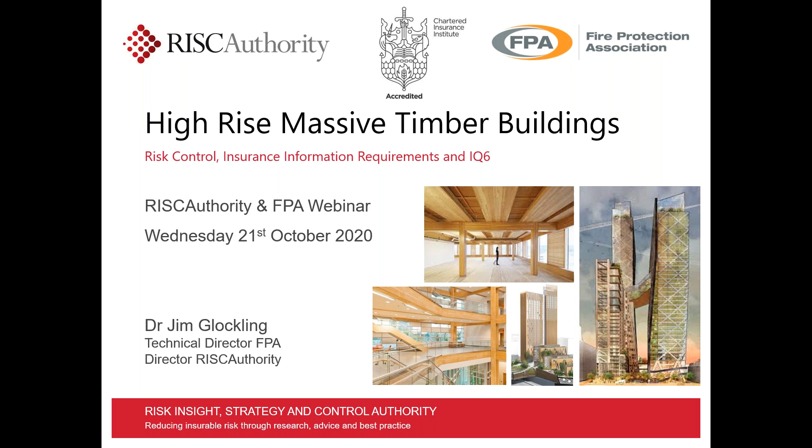Obviously, government only mandates requirements which stop at life safety only. So the work we're discussing here today is the product of the RISCAuthority Passive Working Group. And as Courtney just said, if you have any questions, we'll try and field them properly and get you proper responses, but not during the webinar. It's actually kind of too difficult to keep your eye on all these things at once.

As a requirement of the CII accreditation, I need to show you my credentials here. I've been fortunate enough to work in forensic fire investigation and run laboratories at the Loss Prevention Council, the Building Research Establishment, and now the Fire Protection Association. So that's a little bit on my background and credentials.

It's also a requirement to look at the learning outcomes for this and to revisit them at the end of the talk. So I've thrown in a few seemingly strange elements into this. Drivers for change are worth touching upon, but these next two, the challenge of standards and the simple model for resilience, I believe these are important to cover briefly, because I think that sets the scene as to some of the questions which we ask, and certainly what insurers covered when it comes to understanding how buildings might perform against a range of insurance perils.

Then we look at, just very briefly, at the types of massive timber construction, the safety and insurance perils, and then we give you a walkthrough of the IQ6 questionnaire. We've set aside an hour and a half for this, but hopefully we can cover it off in around an hour and won't go too far over that.

So the background to all of this is obviously related very much to sustainability, and it would be very problematic for anyone not to support sustainability and saving the planet as an ambition. But what we currently find is that sustainability gets pursued in a very single-minded fashion, and this can lead to the introduction of some materials and methods which we find rather confusing and consider to be quite detrimental to the construction of buildings. This shows this single-minded pursuit - it's not an excuse to leave your brain at the door. There does need to be further engagement with stakeholders so that all perspectives are properly understood, because some of them may have quite a strong case for why things need to be done slightly differently.

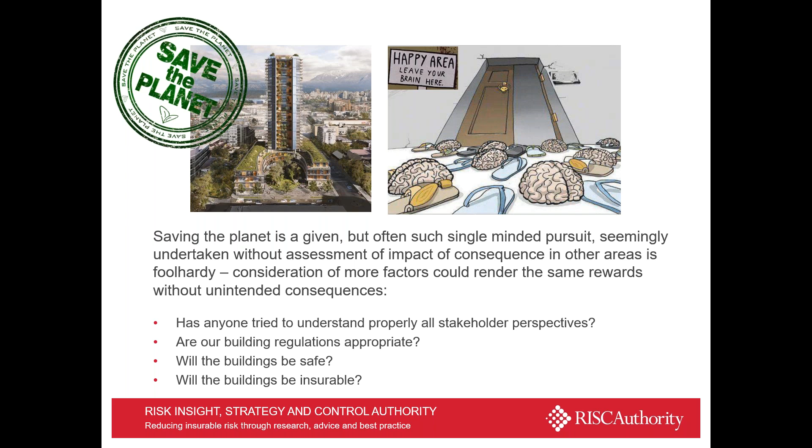I'm sure if done correctly, the advantage of what's trying to be achieved can still be achieved, but without some of the downsides. Really linked into all of this will be consideration of how well our building regulations can support the introduction of these new materials and methods, and whether buildings will still be safe, and will they still be insurable?

So those are the obvious drivers, and you don't have to look too far in the news to see that everybody is signing up to a zero carbon commitment going forward, and very admirable that is too. I think the trouble with this is, whilst it's an ambition that must happen, we do need caveats to accompany some of these brave messages.

Are we going to try and achieve this without reducing safety or property resilience, business resilience, or without reducing service delivery resilience for schools, hospitals, care homes and the like, without reducing fire and rescue service support, and maintaining insurability? These do need addressing, because otherwise we could end up in a very different sort of environment.

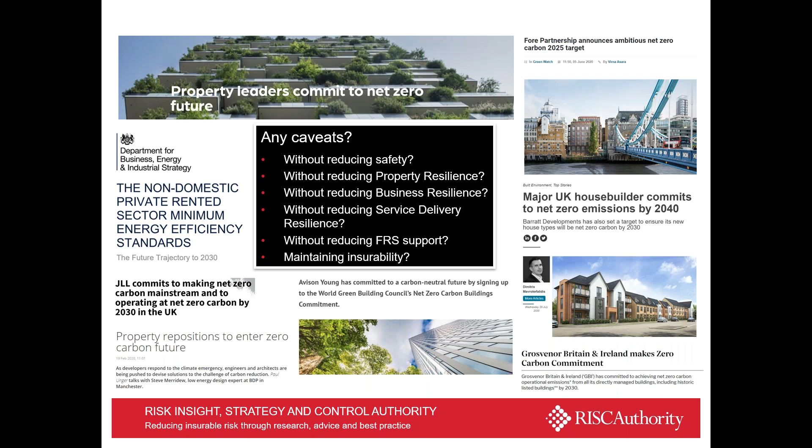And we are starting to see in the news some of these issues starting to arise, and I'll touch on those later on. I mentioned, obviously, we're going to rely very heavily on standards in this brave new world, and I just wanted to look at some of these.

The recent issues with cladding post-Grenfell has highlighted the challenge of standards and how difficult they are to get right, to properly describe how buildings will actually perform at the end of the day.

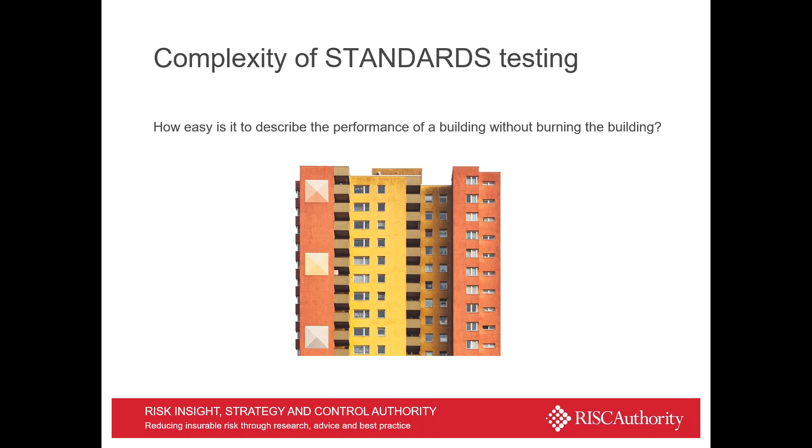Now, I don't want to underestimate it. It's very easy to criticize standards, but I can tell you from first-hand experience, it is also very difficult to create standards which are infallible, and to try in isolation to seek to achieve the overall objective, because it can be very difficult.

But one of the issues that we have is the scale of tests, and what I've tried to put here is a new word, 'monkeyability' - the ability to try and change the outcome outside of the intent.

We go from very small scale testing - you may have heard of things like the bomb calorimeter, which gives you an absolute result on whether the materials put in it can burn. They burn them in a high oxygen environment, and if they can burn, they will burn. The nice thing about this is it's very simple to describe all the materials that go into your building in their key performance of ability to burn, and it's an absolutely dependable result, and it's very cheap to do this type of testing.

When we go up in scale, we get sort of component and composite testing. The item you see second from the left is a cone calorimeter. Now, this type of test has been...

really rather poorly used historically to describe the fire performance for some very large building systems like sandwich panels, where they might take a sandwich panel which in its actual life might span 10 meters, and subject it to a test of just a 10 centimeter sample, and obviously under a very limited heat source that this provides, it doesn't do a great deal. And actually, if you rely on those sorts of results to infer the capability of that material at real scale, you can go horribly wrong.

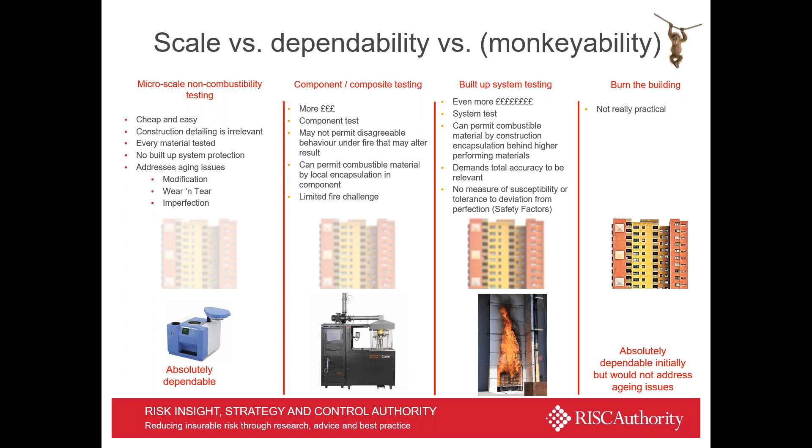How does it differ from the far left-hand side? Well, whilst it's a bigger test, you're testing a system of parts, and so in this type of testing, combustible materials can be tolerated because they can be part of a built-up system where they are essentially encapsulated behind higher performing materials. And of course, on the far right-hand side, we can burn down the whole building, but that's not often practical. So where we go with this, it's quite difficult to establish.

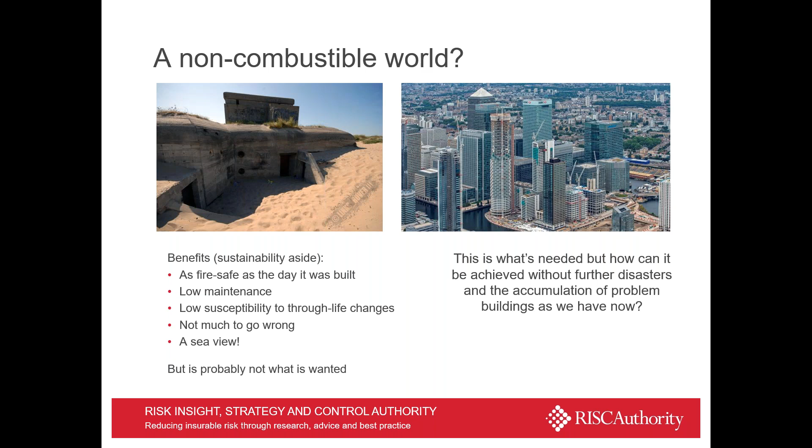And we need, going forward with anything, we need to keep one eye on that, so we're not just creating more problems for the future. And that's very much, hopefully, what this talk will assist with in what we do.

So, in effect, while standards we have got used to relying on them very heavily, it can go wrong. And certainly when it came to cladding, really the test became the focus of effort rather than the real life situation. As I mentioned, it left out some critical factors, and people relied too heavily on it and stopped looking at the building to see if there were any dissimilarities between the test and the building. So that can be challenging.

To standardize really limits the variation of what actually gets experimentally looked at. So you really do have a very tunnel vision of how things respond, whereas actually, when you want to find out how many materials respond, it's good to have variety of what you actually looked for. So it can lead to a very blinkered form.

Maybe an example of that might be for some of the timber testing that we see. We see flames, a ventilation path through a window, but how might that change if the door was allowed to be open as well? Would that change the outcome of the test? So we need variety to understand the full picture for the full scope of how systems get used at the end of the day.

Big criticism, obviously, is that any standard can simply be repeated until a pass is achieved, and all failures forgotten is a poor test. Fires can be chaotic, and we get surprised occasionally in the laboratory ourselves as to how, with seemingly identical tests, one time it performs well, and maybe the other 9 times out of 10 it doesn't. So there needs to be some tightening there.

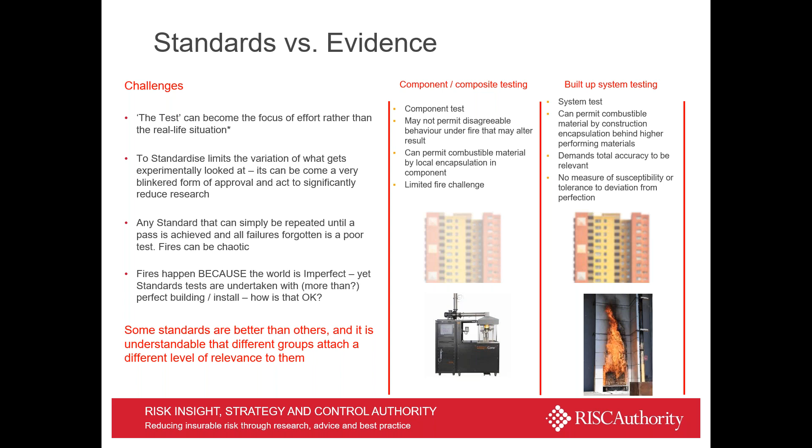If I'm trying to sell a product, I undertake very expensive testing and go to great effort to get a test done and hold it in high esteem, and it must be rather worrying when others may treat it slightly differently. But hopefully we can demonstrate that it's with some reason.

Just by way of example, which I'm going to revisit at the end here, sandwich panels filled with polystyrene. I mentioned earlier how they had a big impact in the food industry. Here is a simple test that we did in the laboratory many years ago.

The incident fire that we applied to this built-up product is described by the red line, and this is the heat release from a gas fire that we put up against it. Now you can see that even at 50 kilowatts, 100 kilowatts, but even at 300 kilowatts, you could almost be mistaken for thinking that this product is non-combustible in its nature, or as a built-up system, it's non-combustible.

However, just turn the heat up a little bit more to 500 kilowatts, and it really plays, and boy, does it play. So great care is needed to put a test forward that will accurately describe the circumstances of end use. At the end of the day, you can only see as far as you look, and tests need to be challenging enough to the realistic environment that they show you the correct response of the materials.

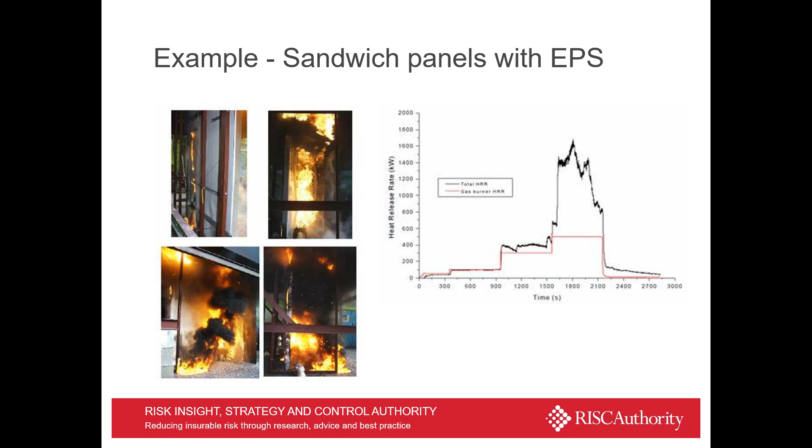Right, that's enough on standards. Just a quick thing on resilience also, and I hope this doesn't appear too off-piste, but I feel it's important. There are mechanisms now within our fire engineering guidelines to introduce new features to the design of a building, not just the architecture-driven ones of form and function and the legislative-driven ones of life safety, but now through documents like 7974, you can introduce business and insurance-driven objectives.

And it starts with a company's business impact analysis. How do we hope to be served by this building? And then that sets the fire safety objectives.

So rather than just think of evacuation before collapse, which, if we're being blunt, is where legislation takes you, you can start to specify other things, such as, well, I'd like the fire to be put out. There's a good starting point. I'd like to recover the compartment within a week, and I'd like to recover the business that I've operated within that compartment within the month and be up to normal capacity by then.

These are all perfectly good fire safety objectives to set, and fire engineering is a perfectly good toolkit of parts to achieve it, but it needs someone enlightened enough in the first place to think further than just what the government needs to see, because it is a very, very low bar.

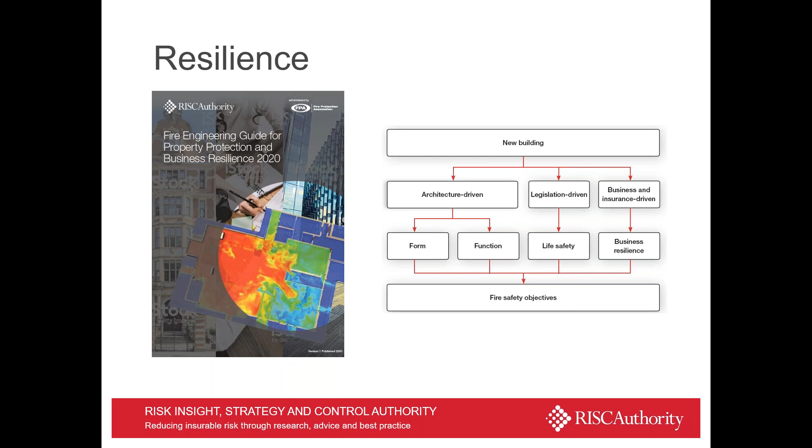Now, if we want to give a nice structure to resilience, because I hear a lot of people talk about it, and it's not always very clear to me, but the best source of information is really from Military Asset Protection, who we do a lot of work with, which breaks resilience down very simply into susceptibility, vulnerability, and recoverability. And it works for any peril, not just this.

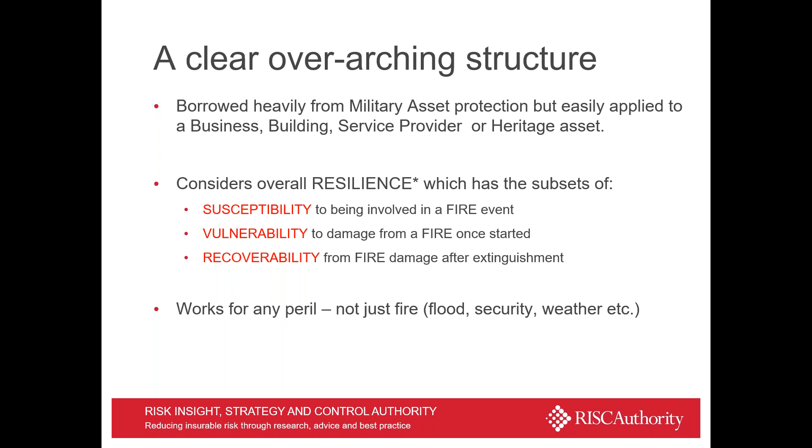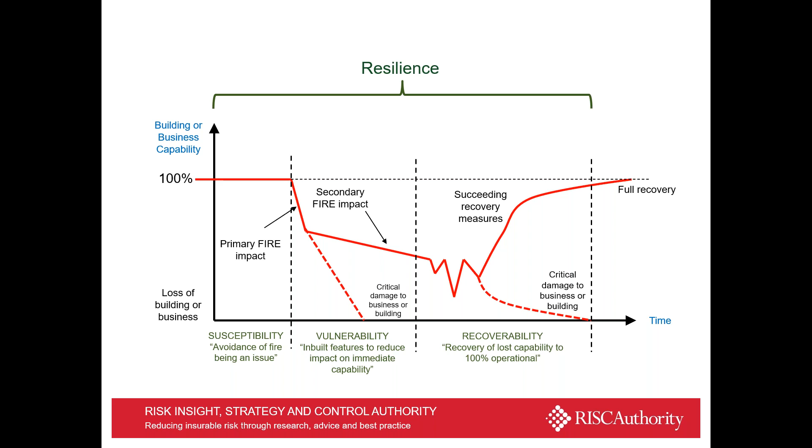And if we look specifically, it also provides a pecking order of the measures that you might put in place to protect your business or your building. Obviously, susceptibility, it's better to avoid than have a problem. But if you are going to have a problem, you need to curtail the amount of damage done. It's a secondary issue. And then thirdly, how you recover is the final stage.

So susceptibility, how can we reduce the likelihood of anything happening? Well, this includes use of non-combustible materials. If things can't ignite, and generally don't catch fire or sustain burning, then you are inherently less susceptible. Preventative management, predictive detection systems, design simplicity, security, and it may look funny being in there, but not relying on people. Having systems, because we know people can cause a lot of problems when it comes to fire, and it's no exception in this case.

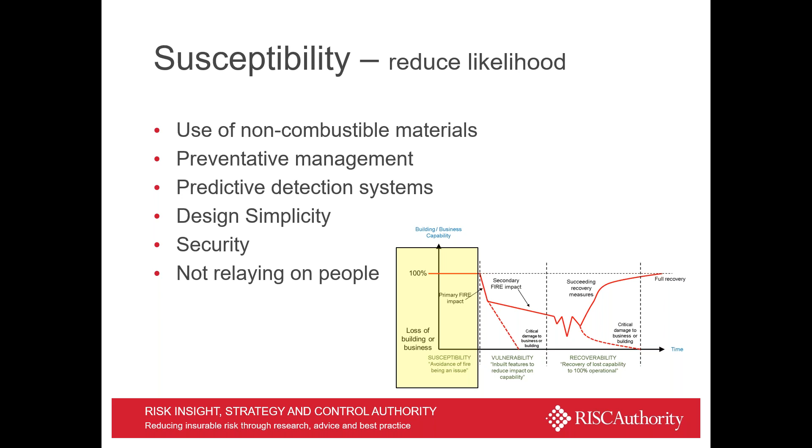Vulnerability. So once we do have an incident, how do we reduce the extent of damage?

Compartmentation, very obviously, provision of fire suppression systems, early detection, provision of first aid firefighting equipment, duplicating your asset. So really simply, if you can afford to lose half of your asset, then just split into two buildings. You'd be very unlucky if both of them burnt down simultaneously.

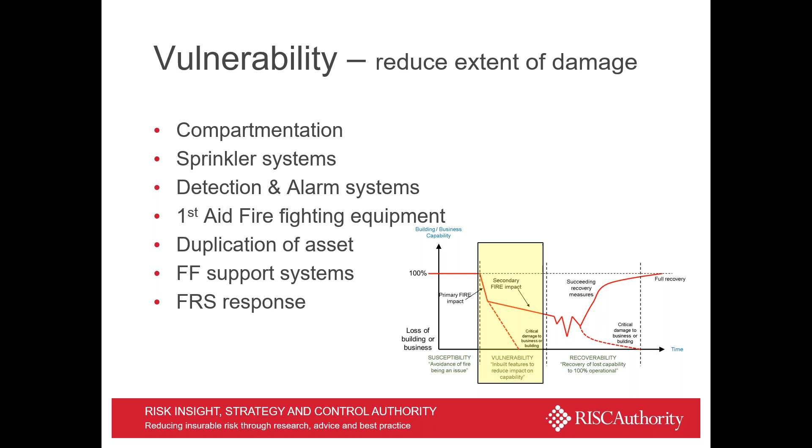So simple measures like that, and often many of these sort of measures are cost neutral. It just takes a good bit of thinking behind it. Firefighting support systems and obviously fire rescue service response, and making provision for them to do a good job can be very helpful in this also.

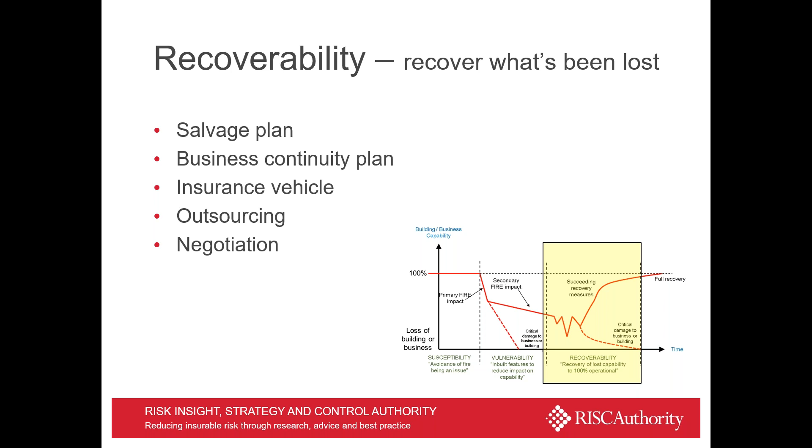And finally, recoverability - having a good salvage plan, a good business continuity plan, insurance, other methods of achieving the same ends, outsourcing, renegotiating your service level agreements can help buy you the time that you need to keep your customers and succeed in recovery. Right, so what's all that got to do with the resilience talk we're talking about today?

Well, it's probably worth having a little look at some of the recent fires that we've had, which, whilst they may well have achieved the life safety goal in that nobody died in these fires, you've got to question whether this was a good outcome.

In terms of susceptibility, what these all had in common was they were using light timber framing or ETICS type systems, which comprise of lots of wood and combustible insulation. And so they were susceptible in the first place.

Unachievable design detailing is a source of much debate at the moment. So on paper, these buildings probably complied, but in practice, trying to put them together on the building site with CAD level accuracy may or may not be there for the taking. Many of these may well have had shortcomings which exacerbated the spread of fire through them.

And also we need to remember that some of our building regulations just don't cover certain things, like fire ingress into buildings. So buildings like this with plastic air bricks in the side, directly connecting all parts of the building and voids by a combustible product - it's not legislated for, but can be problematic, and we know has been the source of many fires.

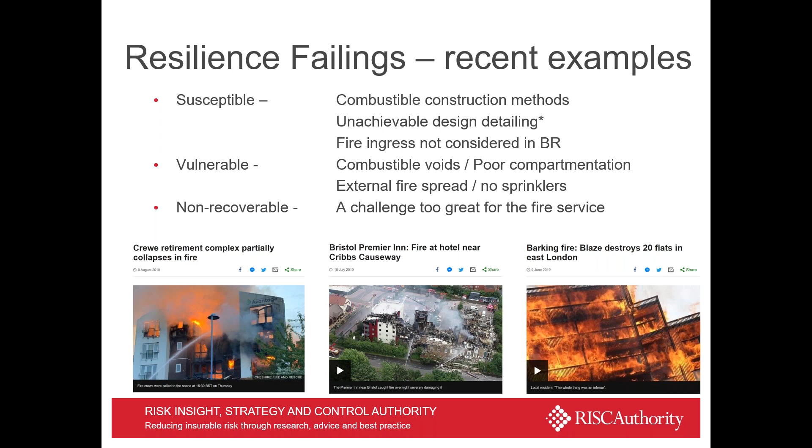In terms of their vulnerability, combustible voids, poor compartmentation, external fire spread, not having sprinklers - that made them vulnerable. And actually, not much point in talking about recoverability in this particular instance, because there wasn't enough to save at the end of the day. But hopefully that puts into context.

So we can now move on and talk about high-rise timber buildings. Now, the drivers for high-rise timber really have to do with their financial credentials - significant cost savings identified, off-site preparation, ease of on-site adjustment, and sustainability, which is very much part of the government's ambition currently.

Let's not forget, they are also very beautiful buildings, and architecturally they will make for a very nice environment to live and work in. But they do present some challenges, which we hope to address today.

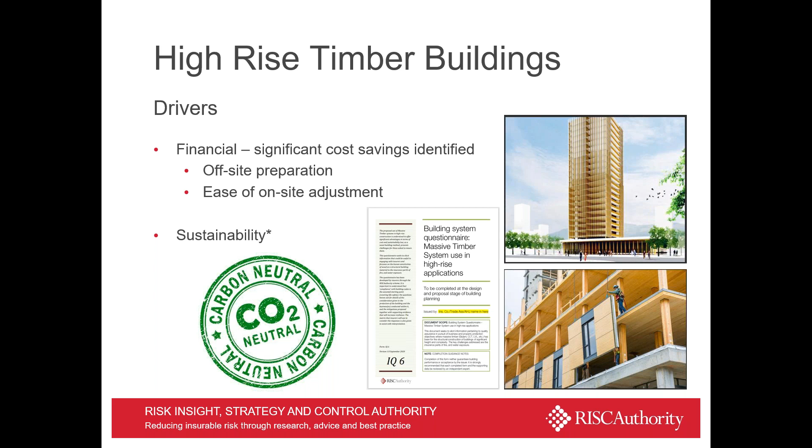Whether you're aware or not, this is currently one of the biggest emerging insurance challenges to date. And the reason for that is that whilst light timber frame buildings - we know there have been issues around that - these are things which, in terms of insurance, it's quite easy to price for and to work out insurance vehicles to accommodate them. But when you start building in high rise...

...it becomes more difficult. These are construction methods and buildings of a type and prestigiousness which are part of major property portfolios, and this becomes a very serious issue to address correctly.

And so we've got the challenges of, obviously, they're combustible. There's been a lot of work looking at perhaps their susceptibility to water damage. These are tall, complex buildings, mixed occupancy, and as we said, they're very prestigious.

The desire of architects to present the full beauty of wood in raw. To date, we're used to challenges to do with wood covering everything over with plasterboard, and we know how that can perform. But it takes us into a new place as soon as we have unprotected surfaces en masse.

We've got to say the current building regulations really haven't done a very good job with low-rise timber frame. So it leads to a suspicion that maybe we'll be ill-prepared for massive timber also in the same way. Having said all this, there are buildings going up, and there is a suspicion that the technology is being deployed ahead of technical understanding, and insurers are being asked to underwrite the bravery of other people's sustainability endeavours, which is a big ask with the levels of information currently available. We mustn't forget, insurance can't be a catch-all for technical recklessness. If the information doesn't exist, it needs to be created.

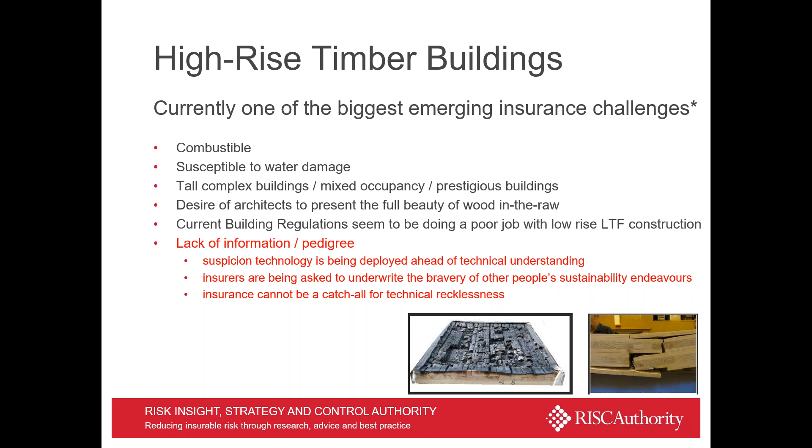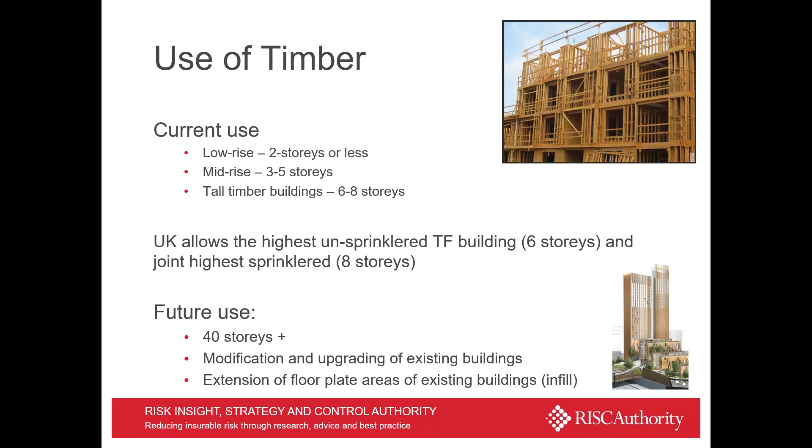Looking at the use of timber, currently we see it mostly in low-rise, 2 stories or less, mid-rise, 3 to 5 stories, and tall timber buildings, which we call 6 to 8 stories. Currently in the UK, we allow for the highest built around the world, I think, unsprinkled. But the future use, we're looking for a future of 40 stories and more, modification, upgrade of existing buildings, and extension of floor plate areas to existing buildings, that is infill. So proposed, it's obviously lightweight and absolutely ideal to get very creative with.

Now, the current barriers around the world are generally to do with the local building codes. One of the lessons we must learn from this - I sat in many meetings when we were talking about light timber framing, saying, well, the Americans don't have a problem with it, why do you? Really the answer to that lies in the different building regulations we have around the world. If you look at the US building regulations, there's an awful lot in there which is about business and property protection. They legislate for, it mustn't collapse. The preservation of cultural heritage, mission continuity - that's business continuity - and controlling moisture, even in this case.

So if we look at the light timber frame experience in the US, all those buildings there, if they're more than 4 stories, they'll be sprinkler protected. If they're over 2,000 square meters, they will have a significant passive barrier. If they are houses of multiple occupancy, no matter what size, they will be sprinkler protected. But in the UK, we didn't ask for any of that. We stick to our requirements of evacuation before collapse. And this has left a little bit of a bad taste. It's almost like, we see America has cars and we think we can adopt them, without the need for airbags and seatbelts, which they determined was needed to curtail the risks which were emerging there.

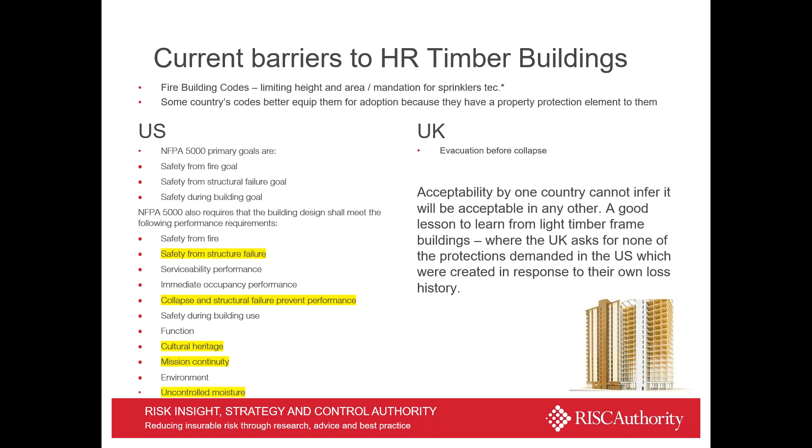This is the background that we have going forwards. And so when we start to compare evidence from other countries, look first at the building regulations, because it might not get built that way here.

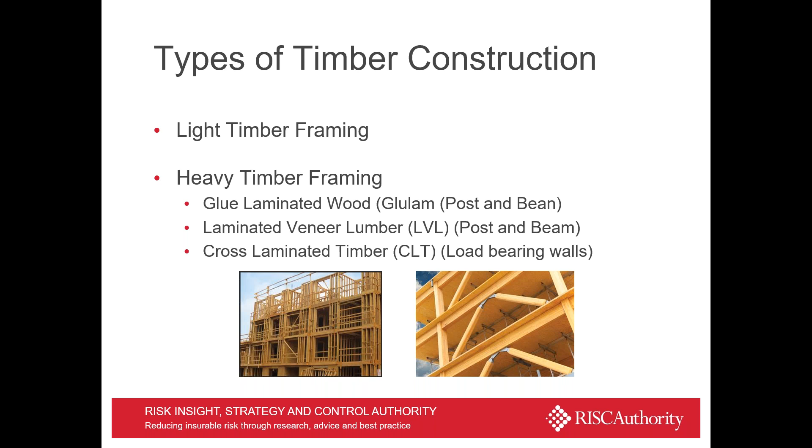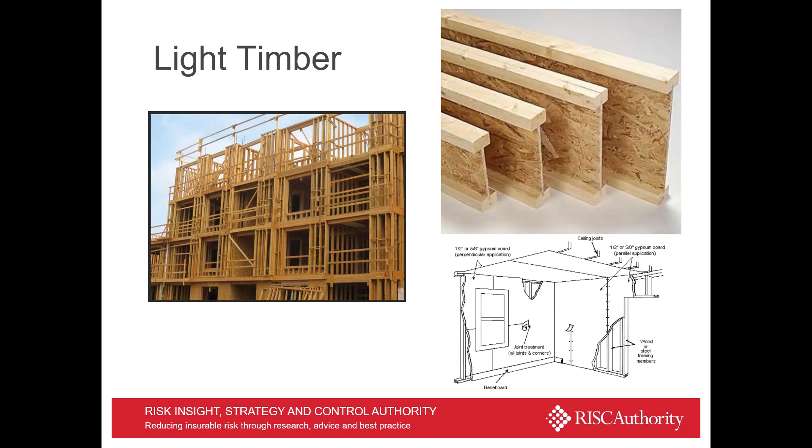So types of construction, although we mentioned light timber framing and heavy timber framing, mostly centered around GLULAM, which is a post and beam type system, laminated veneer lumber, which is post and beam also, and cross-laminated timber, which is a panelised system where you construct your building out of load-bearing walls. There are many other systems besides. Light timber, I think we're all very aware of that, where you use thin stick, and generally the last covering to go on the building will be the fire protecting plasterboard, which covers it fairly universally around. And even you see manufactured joists up there on the right-hand side.

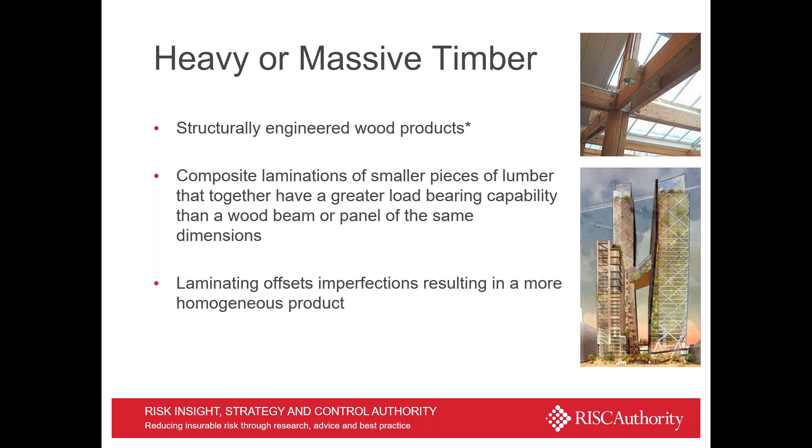Won't be talking any more about that, but heavy or mass timber, structurally engineered wood products, very beautiful, but the idea is that when you laminate pieces of wood together, they can achieve spans and structural loading capacities which are greater than the lumber in the raw of the same dimensions. During this laminating process, all this extra strength is achieved for a number of reasons. You can offset imperfections, resulting in a more homogeneous, more reliable product. And also, let's not forget, in sustainability terms, you can build big beams out of little trees, so it can actually be very convenient for supply. GLULAM, where basically the laminations are used in the horizontal, and the laminations are quite thick plank wood.

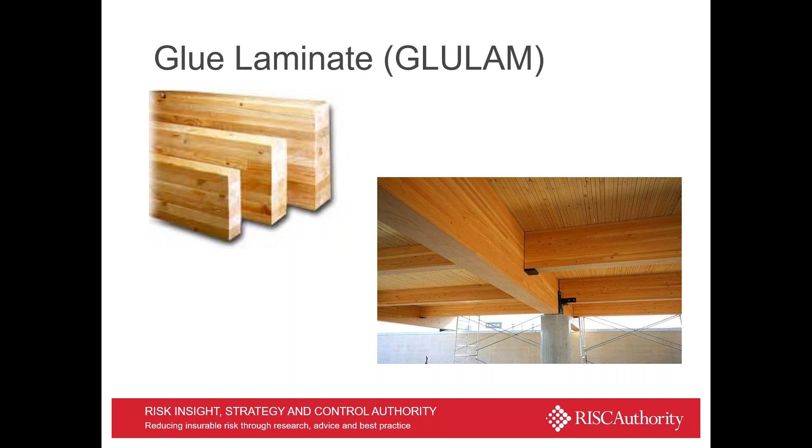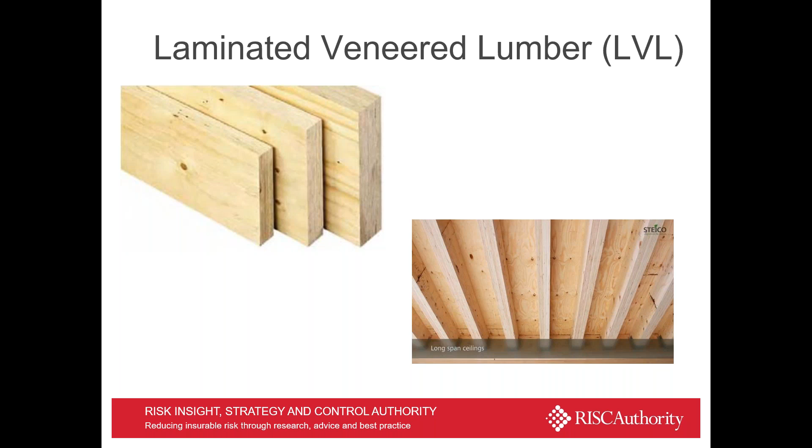Laminated veneer lumber, where the laminates are much thinner and offset from the material which are cut but used in the vertical. Cross-laminated timber, so planks set at 90 degrees to each other, and you can build enormous walls, 20 meters plus, out of this to construct buildings from.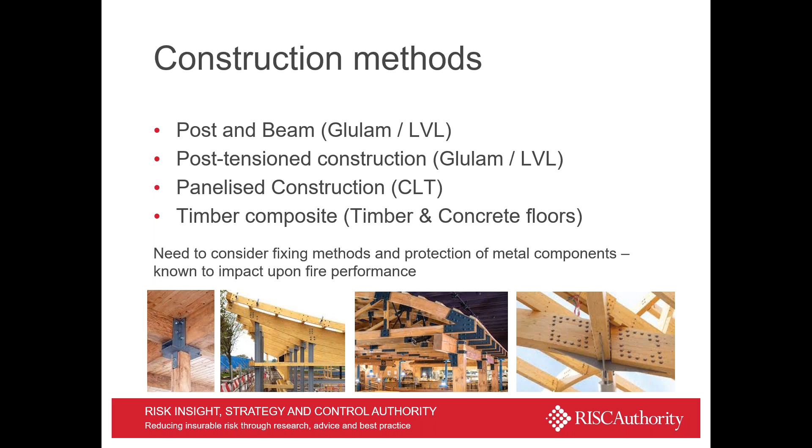And the construction methods we talked about: post and beam, where GLULAM and LVL, post-tension construction, which we'll talk about in a moment, panelised, and timber composite. So just briefly touch on those.

We have post and beam, where generally at the edges there'll be some sort of metal fixing. And again, in terms of discussing fire, we need to know whether these need specific protection, because these are known to be a key failure point due to their absorption of heat during a fire.

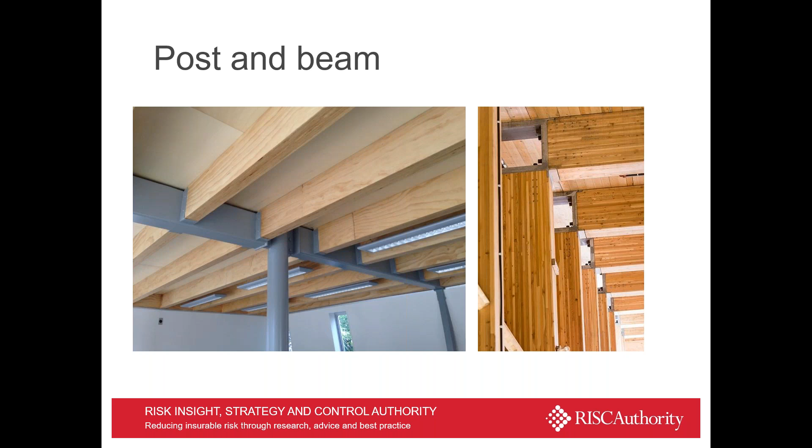Post-tension beams, this is where the load-bearing strength of the beam can be extended by having steel cable running through and tightened to compress it. This can produce very long spans covered by the wood. But if a beam is relying on methods like this, tendons and anchorage, this presents special risks for fire also.

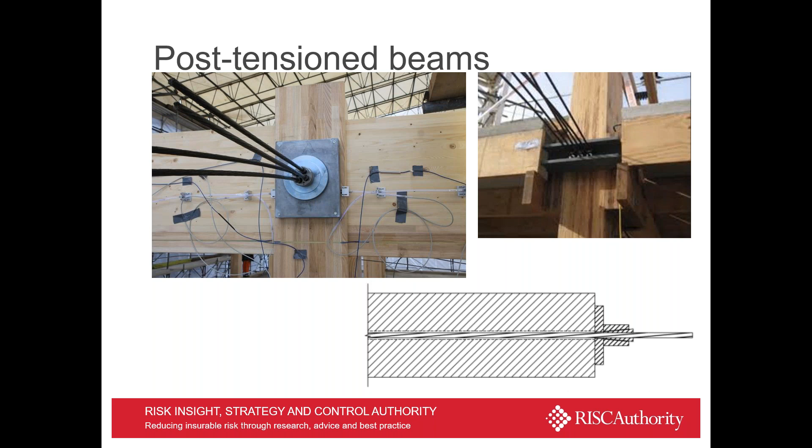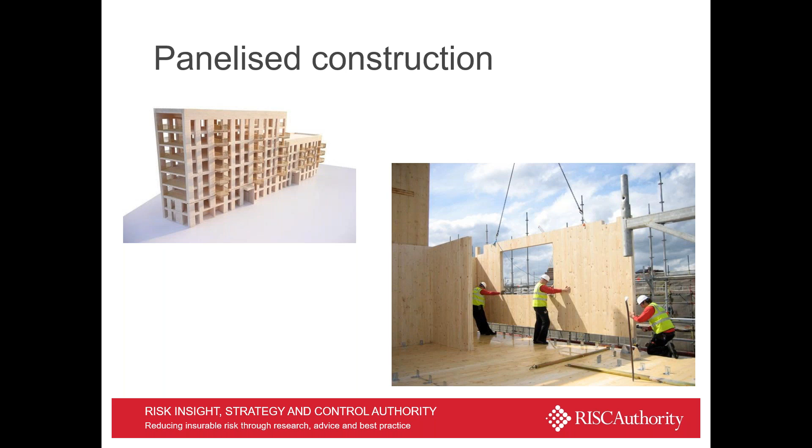Then finally, panelised construction of the type we're becoming quite familiar with, cross-laminated timber, where you assemble whole walls and buildings with load-bearing walls. And finally, timber composites, where the performance of a wall or a floor, in terms of being load-bearing and acoustics, and many other things besides, are improved by the use of concrete on top of it.

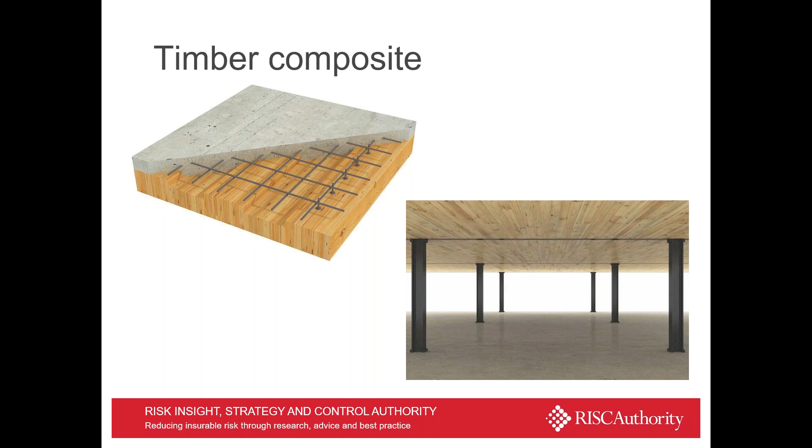So that's a bit of an introduction, hopefully getting you quite tuned into the insurer viewpoint of things and the historic experience. I'll apologise, these are slightly ugly slides coming up, but this is really what the questionnaire seeks to elicit. Some of these might seem quite naive, but I think we need to be treated as naive. This is a new and emerging area.

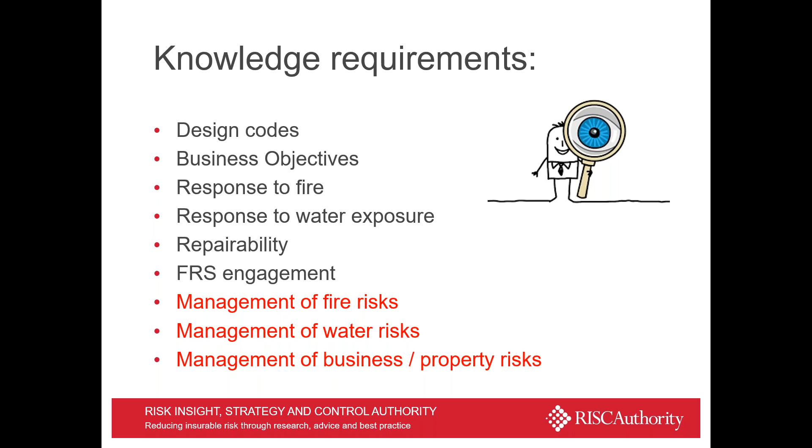Whilst architects and designers may have all these answers, people like myself don't know what level of comfort to have. So we're just going to look at the requirements of the top six there: design codes, business objectives, response to fire, response to water exposure, repairability, and fire and rescue service engagement. This is the information that's really needed to understand how and if to insure a building.

So going back to basics, this is not a forte of mine, but it's of other areas certainly, about the codes used to develop the fire safety management plan. But even going back before then, what are the computer modelling structural codes for massive timber, and are they appropriate?

This represents a change, and when you put a building together to make sure it can stay up and hold the loads it needs, an awful lot of computational evaluation takes place first. Now these codes were once more around concrete and steel, then transferred to wood. How do we know they're appropriate for these types of timber systems? Is it possible to evidence that? What testing's been done? I'm sure it must have been done, but we need to recognise we don't know that.

Let's extend that further. Obviously there are codes for how steel and concrete respond in fire and loss of loading, and the estimation of safety factors and whether they're appropriate. But is the same true for massive timber, and can that be evidenced to us? I've not seen much on this at the moment, but what I have seen still gives you the feeling that this is emerging as a requirement, and yet we know buildings are going up, which might cause some concern, and I hope someone can correct me on this.

More to the point, we talk in terms of steel as being a generic building material, and we talk in terms of concrete as being a fairly generic building material. Is the same true of these massive timber systems, or is there variation between manufacturer and types in terms of the glues used? So when these codes are applied, might they be appropriate for one manufacturer's product but not another's because they use a different glue or different dimensions? The point is, I don't know the answer to that, and if I'm being asked by an insurer, I don't know the answer, but I would like to know it.

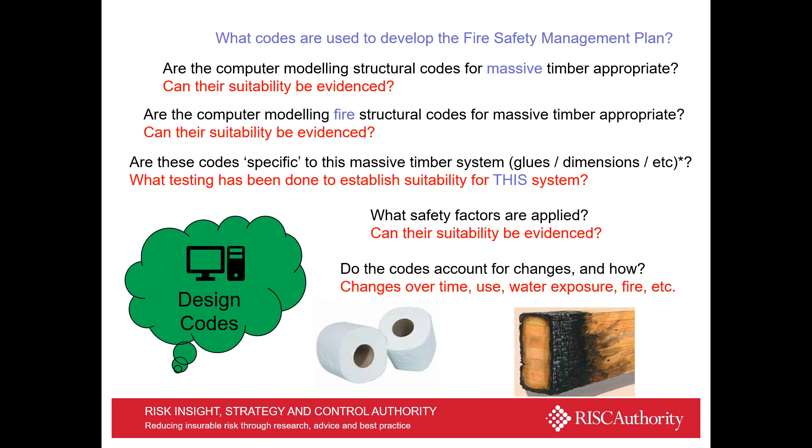How do we actually know about these things and what is the pedigree? Why the picture of the toilet roll? Well, simply put, we know the structural capability of toilet paper when it's dry, and we know not to use it when it's wet. We need to be assured that we have a similar level of understanding when we look at new building techniques and structures. So that's design codes.

Now, what about business objectives? This will probably be quite an alien concept to many of you if you just deal with the day-to-day of life safety. But obviously, the starting point for any insurer is that compliance is a given. And often as not, we see people trying to engage with the insurer with masses of paperwork and beautiful work done to show that life safety objectives are met. But actually, that's a given.

We're more interested in saying, what does the owner-occupier need the building to do? And what are the insurance implications of what's proposed? So there's a question, have the insurance objectives of the business been made clear to the designer? As we mentioned before, if the owner of the building wants more than evacuation before collapse, it will have to have been specified somewhere. And how are they going to communicate that?

Now, there are tools to do that, but has someone asked the question and has it been communicated correctly? It'd be nice to know how this information might have impacted on the design, and also having come up with a solution, are the solutions themselves resilient?

We know suppression systems have different levels of fallibility and likelihood to operate. So resilience actually isn't just about what you intend to do about it, it's about the resilience of the things which will seek to achieve that also.

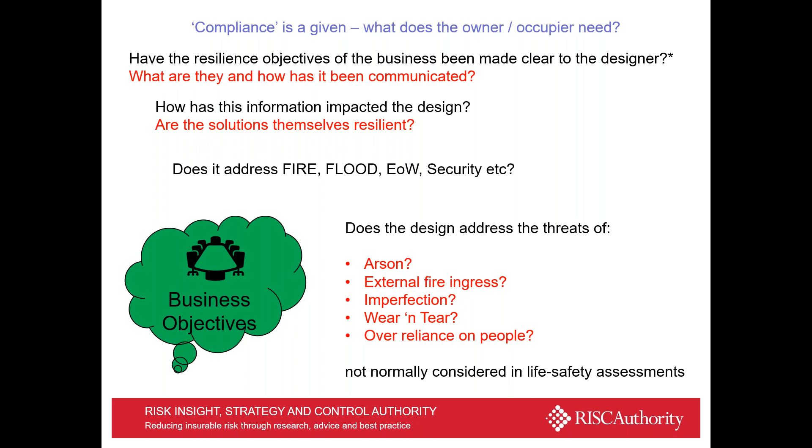Right, and then it'd be nice if my slides would move on. Let me just find out why they're not. There we go. Response to fire.

As I said, compliance to what is required in the eyes of the law only seeks a life safety objective, and as such, it only seeks to delay the spread of fire.

Now, that's all well and good, but 40 stories up, in a building which might be constructed of combustible structure and a fire might be in a void, you've got to ask what ultimately puts the fire out and what are the measures that seek to do that. And if you haven't got an answer for that, then we're in a difficult place.

We also need to consider the role of fixed fire suppression systems, how they're going to be used, and whether the difference between suppression and extinguishing is understood by the users. I often see people put in suppression systems and think that nothing more is needed.

But actually, a suppression system, by very definition, reduces the size of the fire to something which is manageable by others, and allows people time to get out of the building and probably time for people to actually even come in and deal with it.

But if you haven't done the part of working out who's going to come and do what to put it out in the end, the end point is you run out of water or whatever the extinguishing media is, the fire rekindles and carries on.

So there needs to be an awareness of this, that many of the systems which we think are about fire protection are appropriate for life safety means, but not property protection. It needs to be part of a coherent plan that gets to the objective.

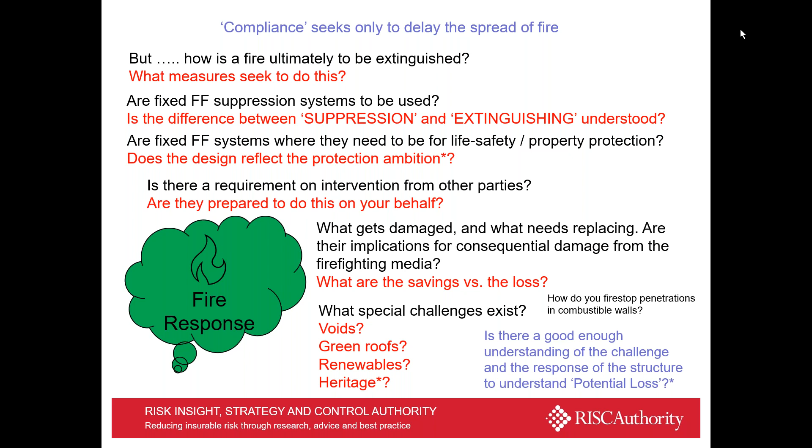There's one other thing I put in there at the last minute when I was reviewing the slides this morning. How do you fire stop penetrations in combustible walls? Sounds like a very simple question, but I've never heard a satisfactory answer to it. So we are some ways off, even with the buildings which we are seeing today.

Escape of water seems like a strange thing to have on a webinar that everyone expects is going to be about fire. But actually in the domestic and residential environment, escape of water accounts for greater insurance loss than fire and security combined, about 1.6 billion.

And obviously with a new building method, particularly a timber one, where water and moisture can potentially be an issue, we need to get a good understanding of that, especially in the multi-story environment where one escape can affect many floors. So we need to consider not only once built, but through the whole life, where are the opportunities for exposure to water?

What opportunities are taken to assure, or what measures are taken to assure protection from water exposure during manufacture, transport, installation, pre-weather tightness, and once in service? We also need to have a good understanding of once it has been exposed, is it still fit for purpose, or does it need replacing? Because if it needs replacing, or even if there's an unknown, there's probably an insurance interest in this.

Now, I'm hoping that many of you listening in who are much more familiar with massive timber structures have all these answers, but I'm just highlighting them because personally I don't know, and if I don't know, I'm sure there'll be many other people that don't know as well. But this is the type of information that needs communicating.

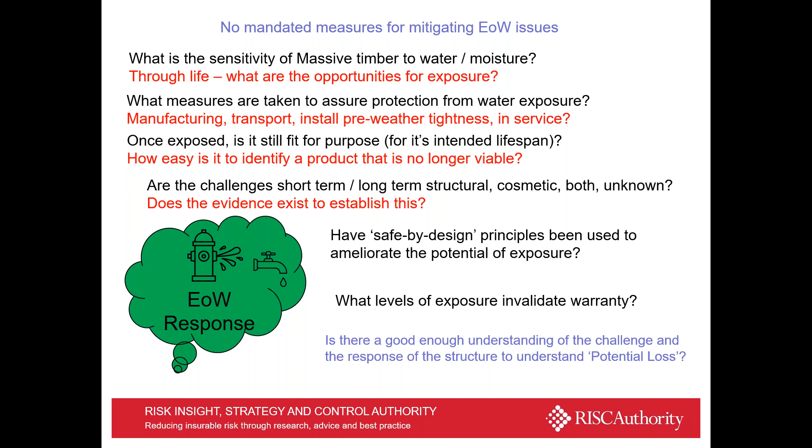In respect of repairability, obviously we're familiar with an environment where if a building component is considered structurally sound, it may stay in place, it doesn't need replacing. But wood obviously has a beauty that's easily tarnished, and we need to constitute what the sensitivities are there. So when there is a fire or an escape of water event, what actually gets lost?

We can assume that the stuff which is now structurally incapable will need repairing. But what about if it's still structurally capable, but it's been disfigured? It doesn't look as beautiful anymore if it's slightly charred. I'm sure that will probably have to be replaced. But what about water staining?

What if it's visibly okay, but future capability can't be assured? Basically, where the warranties are now invalid and something happens in the future. Would that need replacing just because there is doubt? Or we may have situations where things are visibly okay, but there's a residual smell, mustiness, smoke. These things need to be more transparent because they all contribute very heavily to potential EML calculations.

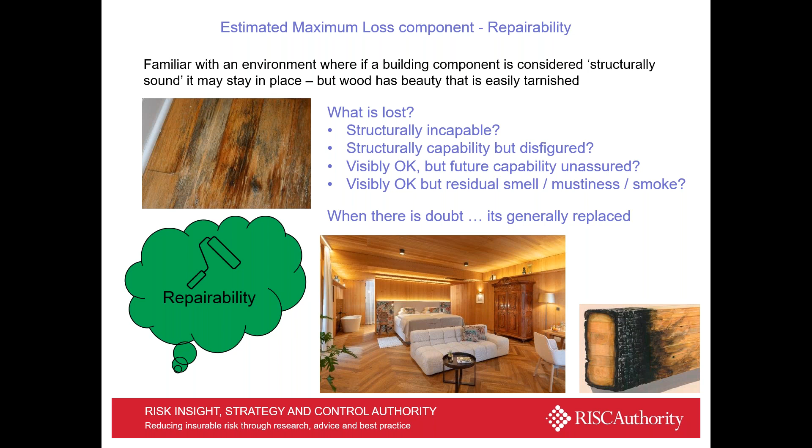Now, a little bit about the fire and rescue service. There are many people listening in from the fire service, and I hope I'm not speaking out of turn here, but it often surprises people that they've got no mandated requirement to protect property and business. In actual fact, by the Manual of Firemanship, they're almost forbidden from taking risk to save business and property. So I think there is a perception that they will take higher levels of risk to save your business and your property than they are actually allowed to do.

So in any design, do the protection assumptions have a dependency on the fire and rescue service? There's going to need to be some engagement so that they actually know this, and have they agreed to make necessary provision for it? Will they always be able to assure that level of support? We're not just talking about today, we're talking about years hence. There are many changes going on in the fire service with changing levels of support based on cost constraints and many other things besides.

Do they have the right equipment to provide the necessary support? And finally, post-Grenfell, something which has been highlighted enormously: have they been specifically trained to deal with the challenges specific to high-rise mass timber construction? Certainly that was put forward as a strong case about the effectiveness of fire and rescue service at Grenfell - just not being familiar with cladding fires. And how do you gain that knowledge?

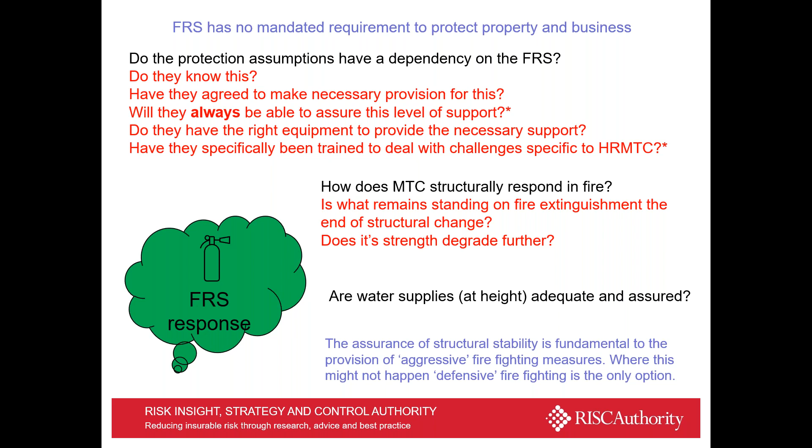So in summary, as I've just mentioned, structural stability is fundamental to the provision of aggressive firefighting measures. And where this isn't to be had, defensive firefighting might be the only strategy that keeps everyone safe, but ultimately doesn't get the job done. So a little bit about IQ6.

We produce a suite of insurer questionnaires to elicit information where technologies are new or understanding is generally poor. We find these help with communication between the insurer and those proposing to use a system, and they can be very useful. What this does is seek the information required to understand the insurance risk situation. Many questions might not currently be answerable, but at the end of the day, that needs to serve as a red flag - it's probably what is missing. It focuses attention on the real challenges that need addressing, and hopefully leads to an overall improvement in communication. I'm hoping that many of you listening in will now be better informed of the insurer perspective. You may not agree with it, but at least you understand where their concerns lie.

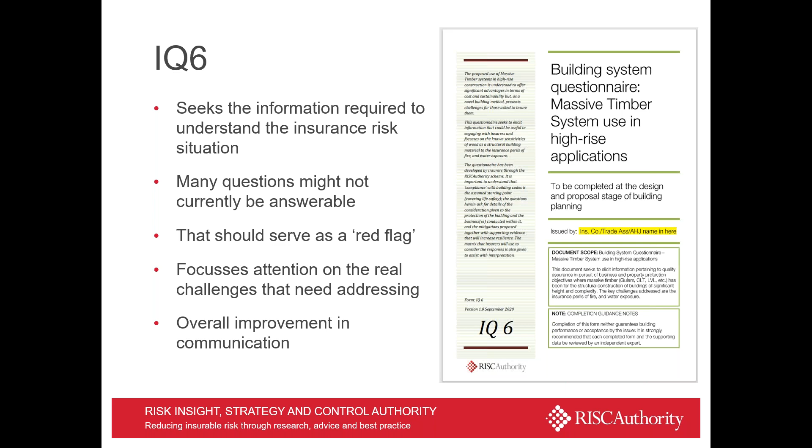And yes, as part of this, we have in the front of it the insurer scoring metrics. Now, this isn't for any user to fill in - this is for the insurer to fill in once having read through the answers to all the questions provided. We have noticed in the past that sometimes people completing the questionnaire helpfully score their own homework. But it was considered important to put this up front so you can get a good understanding of what the insurer is actually looking for at the end of the day.

And these questions really look at the quality and completeness of the provision of answers, whether all the risks have been adequately considered, and whether the evidence is there, whether the standards are there to support it, and whether standards might be insufficient because it represents a new area - have justifications and evidence been provided by other means. And when you look through those, it also asks whether there's been sufficient engagement with the fire and rescue service in doing this, and have we considered the whole lifespan of the building?

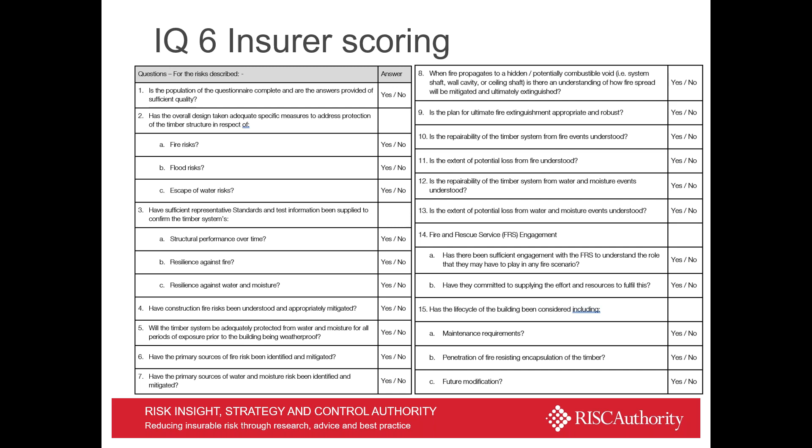So that's really all I have to say on that. And really, if I had to summarize the key issues of what we've been through today, possibly too quickly, I hope it all makes sense.

But the key issues are, this is a new building type, and certainly a new scale, and we've got very little evidence to draw upon. I know there's a lot of work going on in the background, and hopefully a lot of these questions will be answered. We need to know if the structural design codes are sufficiently developed.

We shouldn't assume that the experience in other countries will be relevant to the UK. We've got to start by comparing the supporting building regulations first. Ours are particularly weak, and that doesn't help.

Post-Grenfell, this type of construction does seem counterintuitive, and not too sure how it will be implemented, given the combustibility ban above 18, now possibly 11 meters, depending on which way things go. But with wood so focused, so part of the government's drive to sustainability, something needs reconciling there.

That doesn't make sense at the moment. I don't think it's unfair to say that the light timber frame experience would suggest caution, but that will be in people's minds.

There are potentially huge insurance exposures due to the scale, susceptibility, and portfolio type, as we mentioned before, of who will actually be putting these buildings up and operating within them.

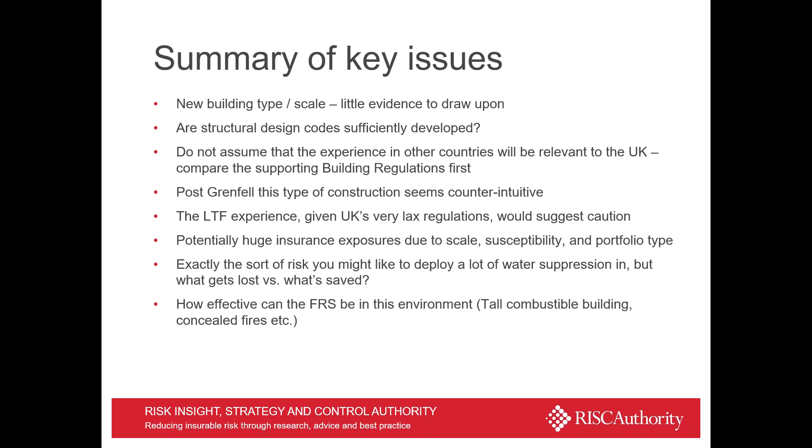So I'm just going to review quickly, before I wrap up, just the learning outcomes as a requirement of CII, just to review what we've been through. Hopefully we've covered why we have a need, what the drivers for change are. I hope I didn't dwell too long on the role of standards and resilience here, but I do feel they were important to understand where we are coming from with this. We've been through the types of construction, the safety and insurance perils, and we have gone through the IQ6 questionnaire.

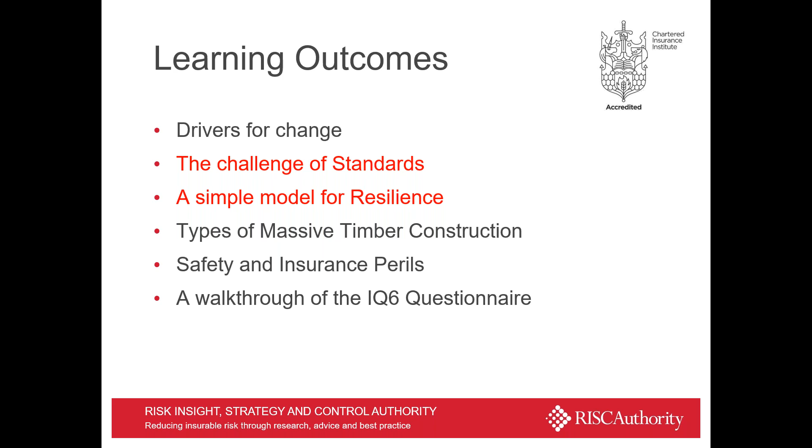Now, this is not the result of an explosion. This is the result of the selection, the poor selection of materials. But it comes back to, we mentioned about polystyrene sandwich panels.

Now, the reason why I want to highlight this is people often think that selection of materials doesn't necessarily lead to rapid fire spread. And this video shows how wrong that assumption can be. I'll just get it going.